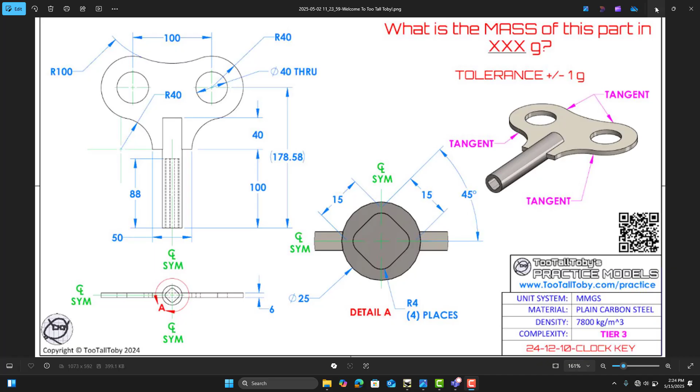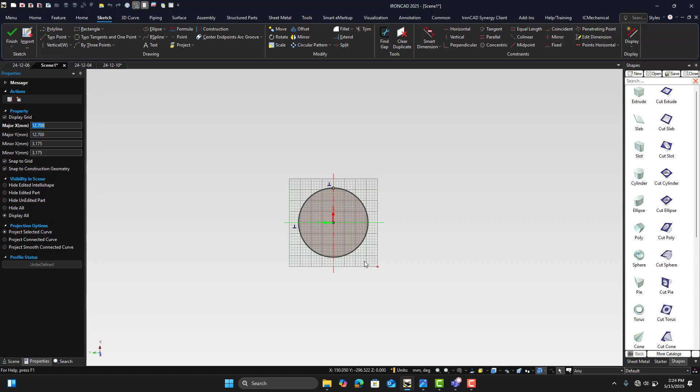So what we'll do is we'll begin. So we'll add a cylinder here. We'll adjust the diameter to be 80 because the radius is 40. We'll adjust this down to be 6. What we'll do now is we'll go into the cross section. We'll go to display, show endpoint dimensions. We'll move this over to 50.

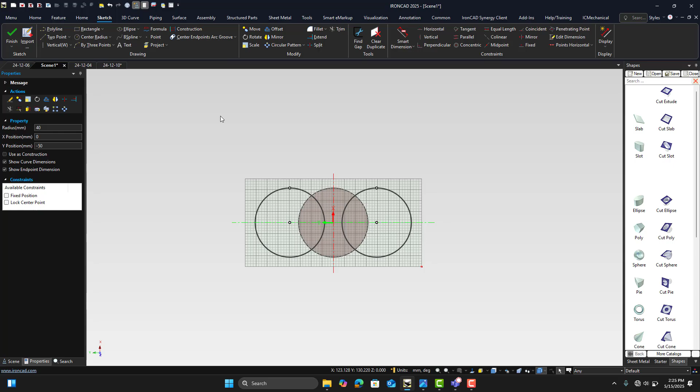We'll create another center radius, which will be here. Make the radius of this 40. And what we'll do is we'll go into this part here, adjust this to be 50 from the middle. Next, we'll go and we'll add two tangents to create that line here. This has a radius of 100. And then we'll take a 2-point line here and we'll add it there.

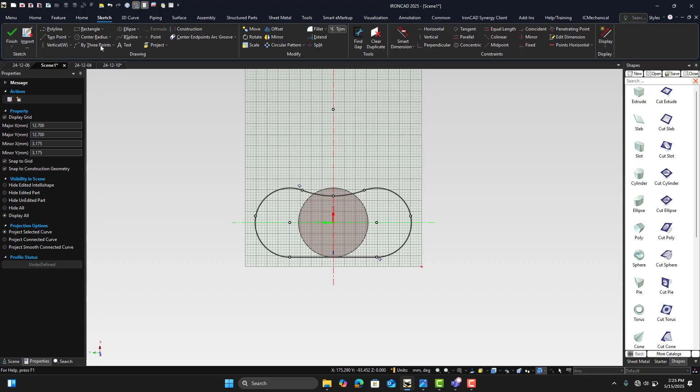So we'll trim these sections here, and then what we'll do now is we'll go and add another center radius for the middle parts here, which will give us, these have a radius of 20 on both sides. Radius of 20. We'll click OK, which will then give us this key.

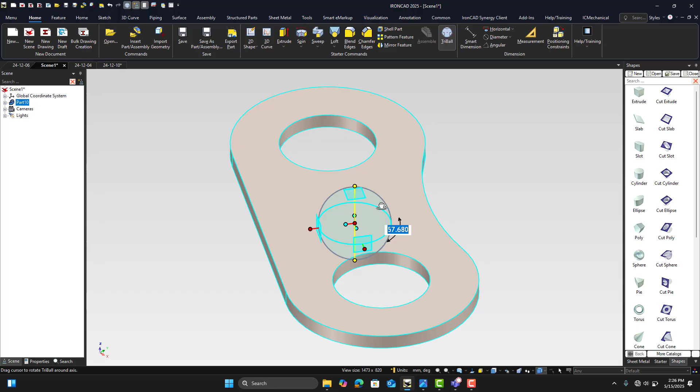We'll use triball and we'll spin it around 90 degrees here. Let's try that one more time. 90 degrees. Okay. Next, what we'll do is we'll go and we'll add this little key section here. Let's add an extrude block here. Adjust it. All right, here we are.

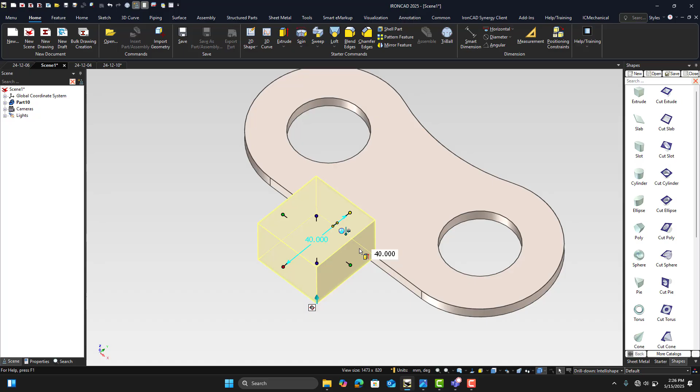We'll add this point here. This needs to go out 40. We'll bring this down here and we'll match the faces. All right. The total width of this part needs to be 50. So we'll make this 50 here. All right. And what we'll do is we'll add a blend to this corner.

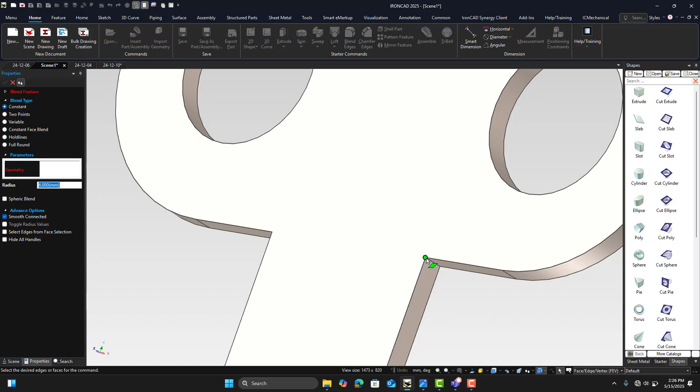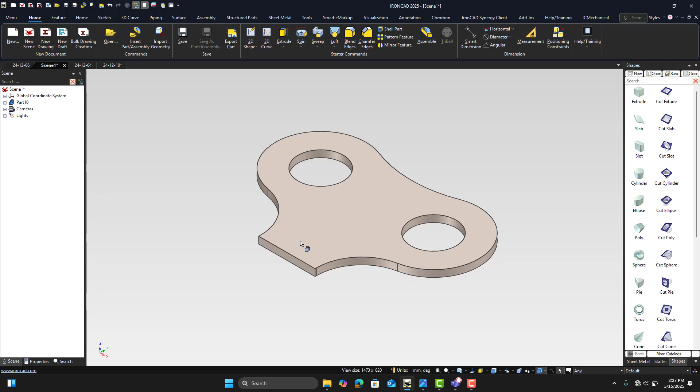The blend has a radius of 40. Same here, radius of 40. All right. Okay. Last thing we'll do is we'll come in with the key knob here. So we'll add a cylinder here. The cylinder has a diameter of 25. We'll bring this up.

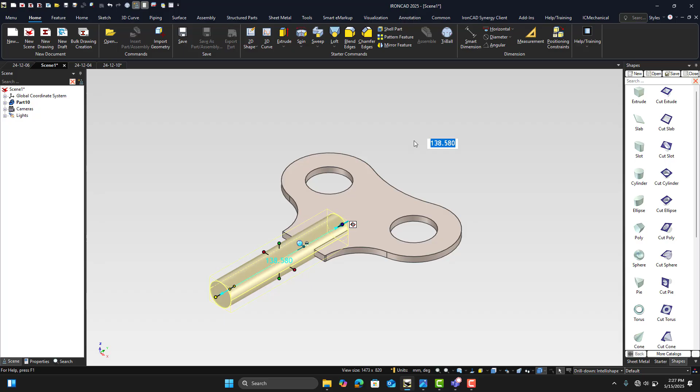Okay, so this point to this point here is a total of 40, and we'll bring this out to be 138. Do from the center point, 138.58. Okay, make sure to adjust this. Make sure to leave this.

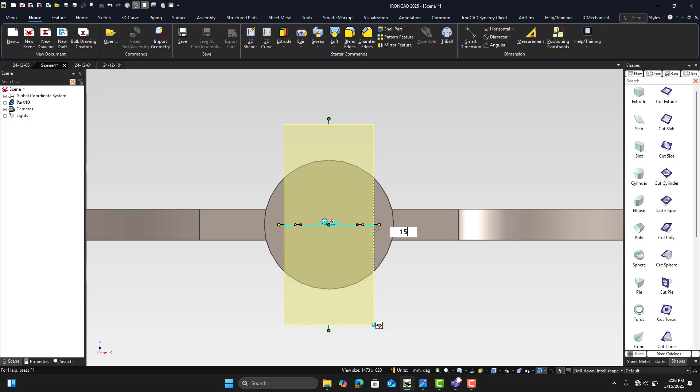All right. Now, what we can do is we can come to this face. We can add in the cut extrude. This has a width of 15. And then what we'll do is we'll rotate it 45 degrees. All right. And this will go inside 88 in depth.

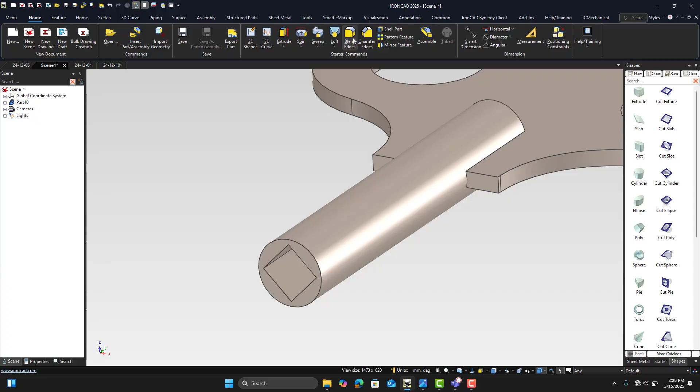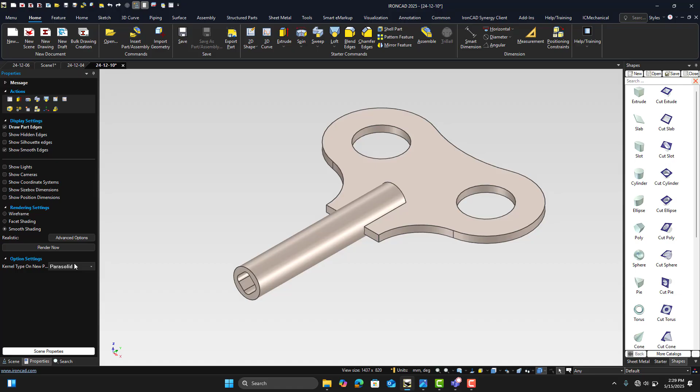And then we'll add the blend as well. Blend here. This blend will have a total radius of 4 millimeters, here, here, and here. Click OK. And here is the part. Now we'll go to Properties, select the part, and we don't have to adjust the density in this case, but the mass is 930.